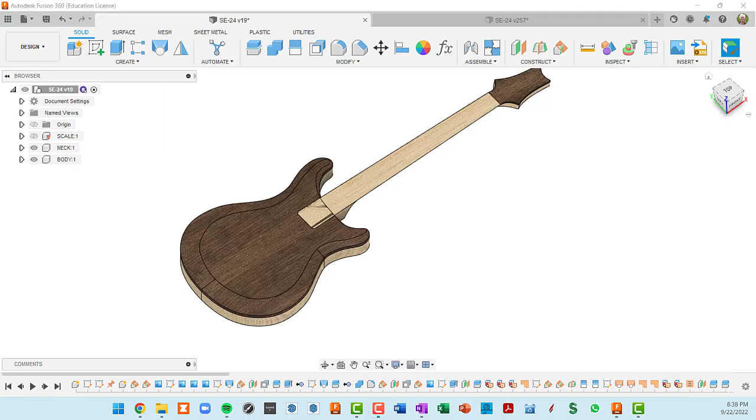Okay, let's get started. So this is where the Fusion file sits right now. We've got a body that's created and a neck. The body has a contoured top, but does not have the famous PRS neck access cut here, and also a belly cut on the other side. So I'm going to start with this neck access.

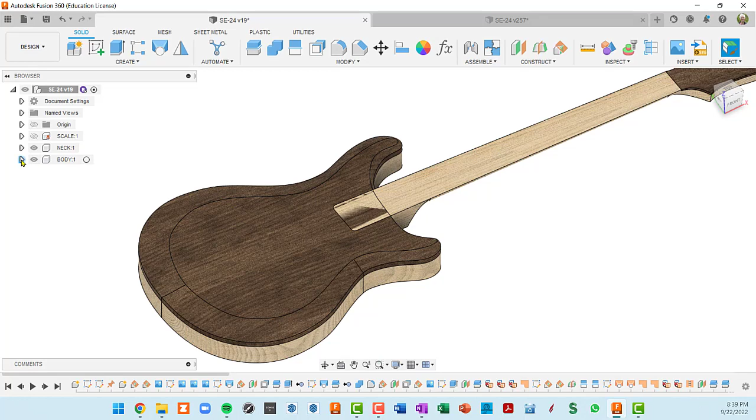And to do so, I'm going to activate the body component, because we're going to be working inside there. And I'm going to turn this canvas on, and I'll also clean things up here. I'm going to hide the neck, and we can leave the construction folder going right there. Okay, so this is the body cut. You can see it in the

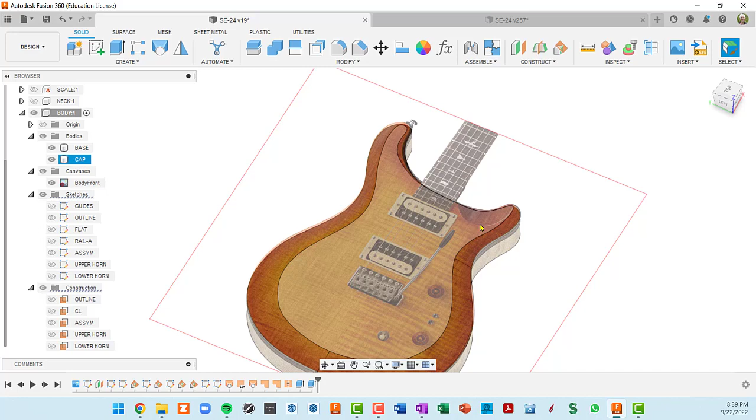captured picture. One thing I realized when I was trying to figure this out, I took a beer can, and it actually fit pretty nicely in this cut, at about a 45-degree angle. So I got a rough radius and a rough angle from that, and something that looked pretty good that I was happy with. But I'll show you how to do it, and you can play around with it to your heart's content.

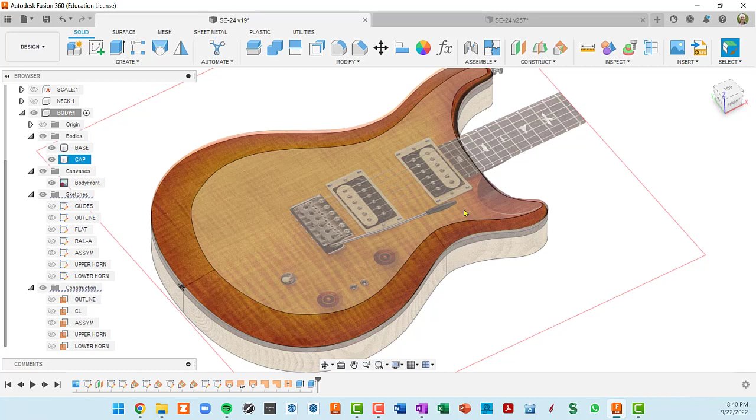So what I did to start with is create a sketch on this top surface. So I'm going to pre-select that top surface. Once again, we're in the body component, and then I'm going to create a sketch, and we'll just spin it around here. Okay, so if I turn on our guides, you can see there's a line here and a line here that was purposely added for this in advance. It basically shows where that cut starts and stops.

So I'm going to project those two lines in. I hit P for project, select the two lines, and then press enter. So those are now in the sketch that we're working in. And I'm going to basically just draw a line where I want the midpoint of this arched cut to be. What I found worked best was to start pretty close to here.

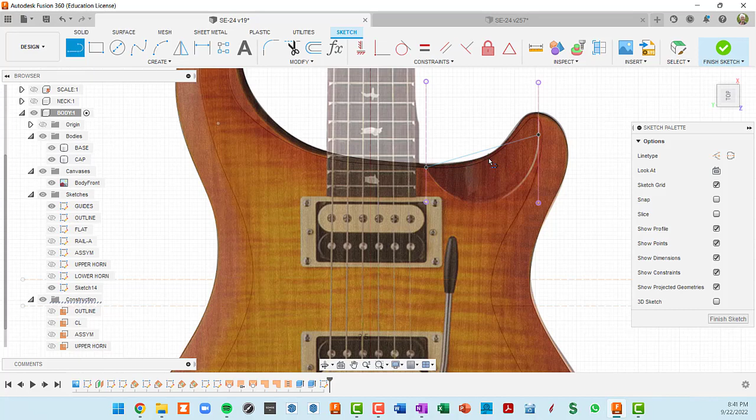So I'm intersecting this guideline, and I'm going to intersect this guideline. In this case, I'm not going to go all the way out to the end. And this is kind of defining a semicircle here, not quite, but almost. So I made my line. I'm going to click on it and press X to make it a construction line. And now we're going to use that line to make a plane at an angle.

So I'm going to finish this sketch, and let's go ahead and name that. We'll call that neck access. And I'm going to select this line. I'm going to go to my plane at angle right here. And so here's a plane that's centered around this line, and now we can set the angle. So I'm going to type in 45.

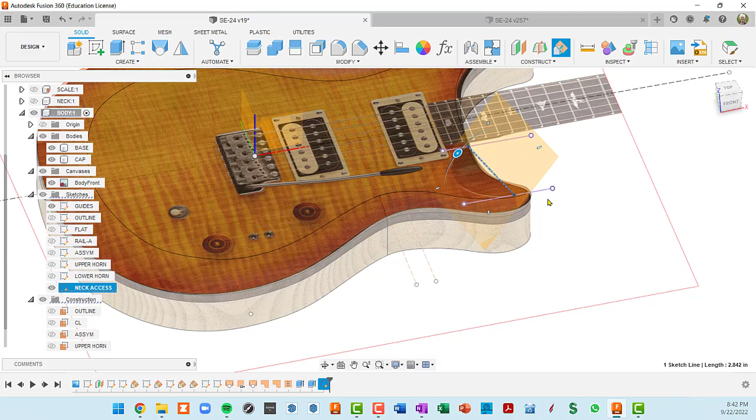And you can see that basically I want to project something on this plane and then use it to cut through to get our cutaway. So we can now sketch on this plane. So I'm going to pre-select the plane, create a sketch. Oops, I created a component there. Pre-select the plane, create a sketch.

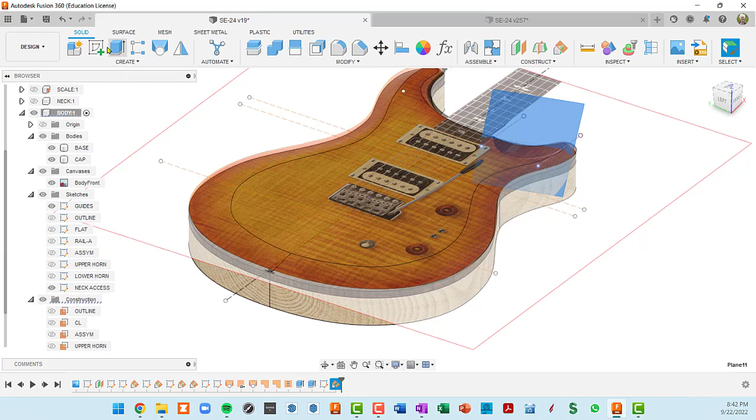Okay, so now I'm going to get a 3-point arc, and I want to intersect with those points that I made between the two guidelines and the line that I just drew. So I'm going to hit escape to get out of my 3-point arc, and let me hit P for project and scroll over here so we can see what we're doing.

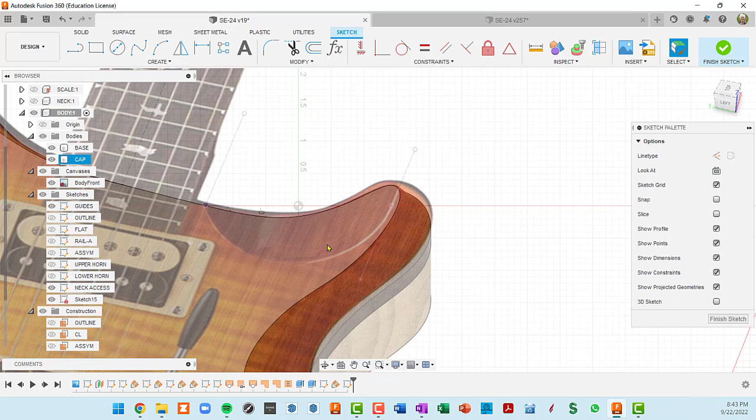And this line and this line, what I really want is this point right here and this point right here. So basically where the line that we just drew to get the plane at angle intersects these two guidelines, those are the two things I want to project in. So projection is now in, and we're on this angled plane.

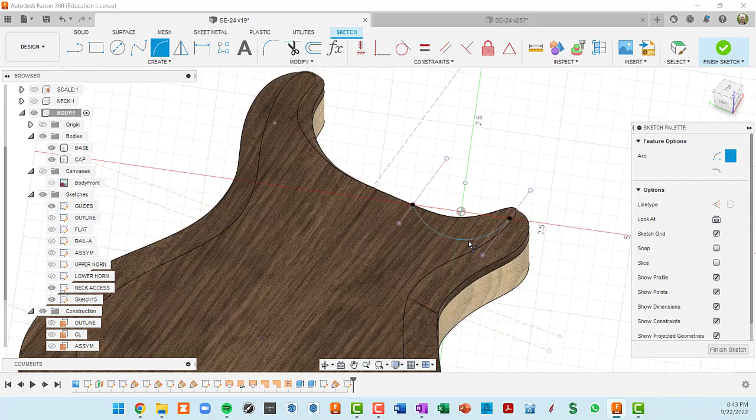We now want to get a 3-point arc. And now we can click here and here, and then drag a radius back. I'm going to temporarily hide this canvas so you can see this a little bit better. Okay, so I'm going to put a dimension on here. And I found out, just experimenting with this, 1.6 was pretty good for me. So now we've got this in a sketch, and we can use that as a cutting surface. So let me finish the sketch first.

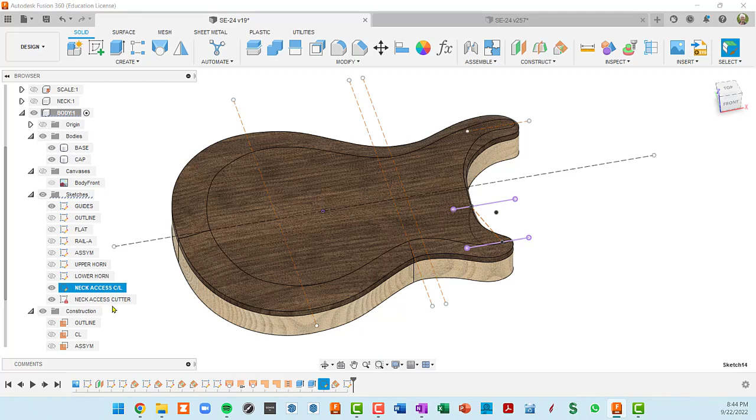So this is our neck. Let's call this neck access cutter. And the other one, let's rename that other sketch that simply has that line in there, neck access CL, center line. So this center line right here we have, and we also have this.

We don't really need the center line anymore, so I'll hide that. And we now want to use this as a cutting surface.

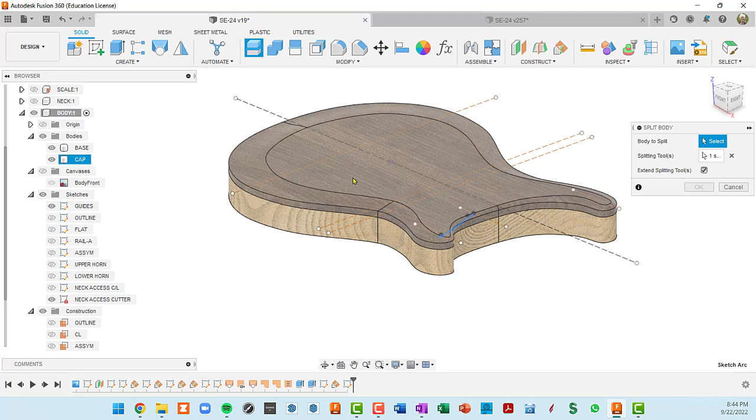So if I go to split body, I have two bodies to pick, so I'm going to pick this body and this body. I guess I had pre-selected, so let me start from scratch here. Let me turn sketches off, well not all the sketches, but I'm going to turn the guides off. We still want this sketch on because we have to select that arc right there.

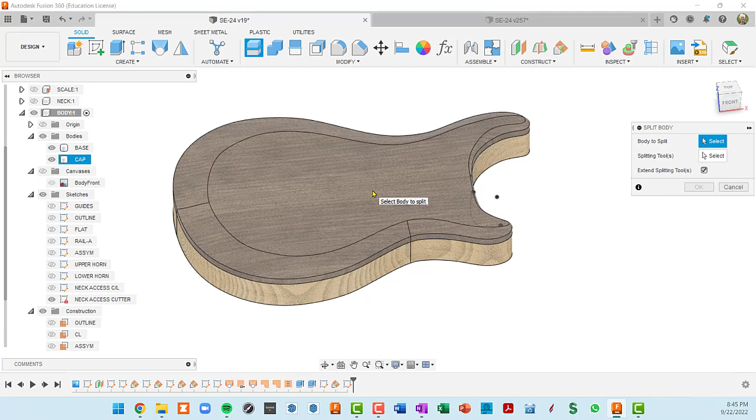So select bodies to split. We want the top cap and we want the body base. And then for splitting tool, we've got something inside here. Let's see if we can select that. Okay, so that is selected. And in this case, I do want extend splitting tool.

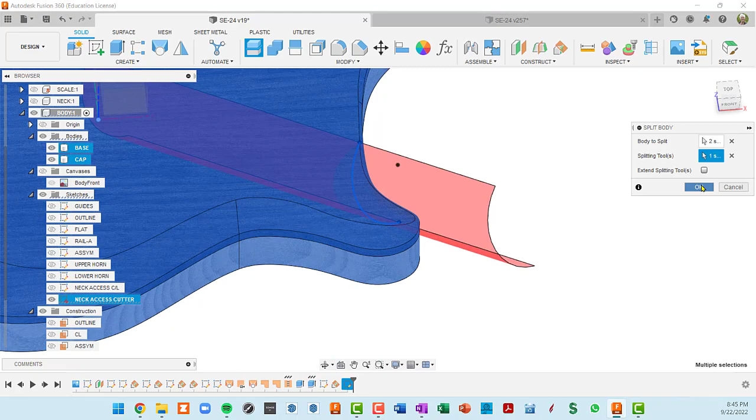Well, let's see, we may or may not need that. Let's do it without first. Okay, so that was a problem in that it didn't go all the way to the edge of the body.

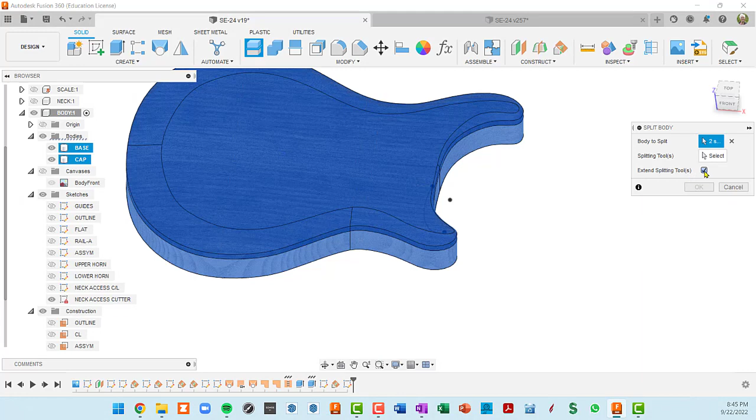So I'm going to do the same thing we just did. Do another split body. The one we just did failed. So I'm going to pick our two bodies here. We'll also turn off our guides. And this time we're going to extend splitting tool. So I've got to select that arc again. So there's the arc, extend splitting tool is on.

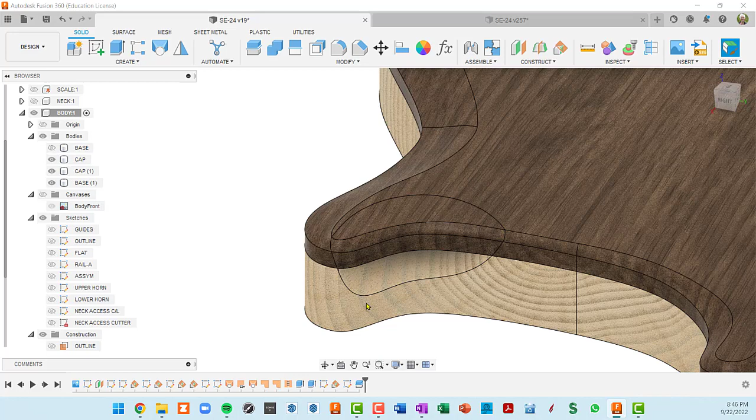So now this is going to extend and cut all the way through these bodies, and that should work. And it did. So now we have some extra bodies to get rid of. The way I do this is I just try to hide something. You can see that that body went away, and this body went away. So we want these two bodies and we want to remove the two that are hidden.

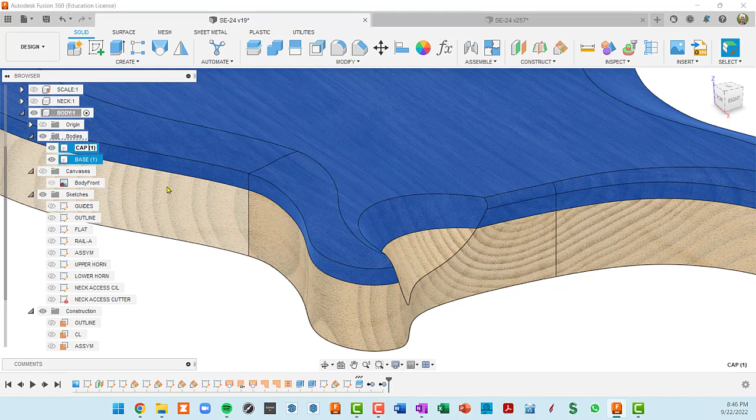So I'm going to click and shift click and right click and do a remove. And then if you really cared about it, we can come in here and rename these guys to get rid of the automatic suffix that was appended to their names.

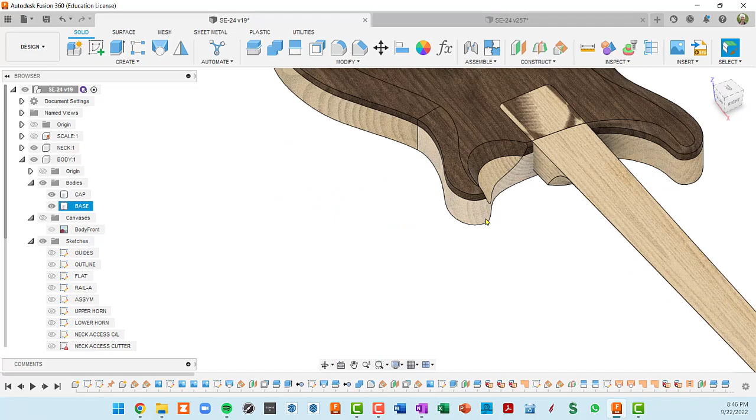Okay, so let's take a look at that. Let's go ahead and put the neck on. Turn that on, and we'll go up to the top level component so we can see everything clearly. And take a look, we've got a nice neck access cut. It doesn't quite go to the neck, which is the case in my PRS, and it's very similar to that.

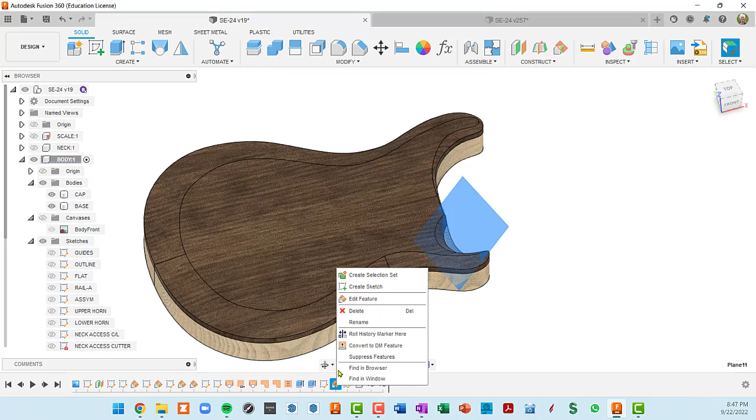So all you would have to do if you want to play with this is go into the sketches. If we go back to the body, let me hide the neck, and you can basically do an edit feature here to change the angle of the plane. That would change the angle of what we cut if you want to make it a little steeper. You can go into this sketch and you can change the radius.

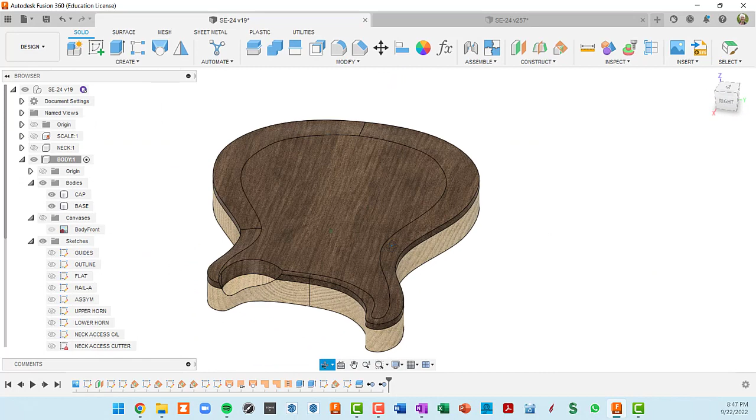Let me just do that here to show you what we get for a difference. And if I do an undo, so it's slightly different, it's not much. But if I go back to 160, you can see that that's a little bit different, not much.

Okay, so that is the first cut that we're going to do. Next I'm going to create the belly cut on the back side of the guitar. So to do that, I'm going to import a canvas so that I can trace a spline where this belly cut is on the back. First off, I'm going to make my canvases visible, and I've got my body as the selected component here, the active component.

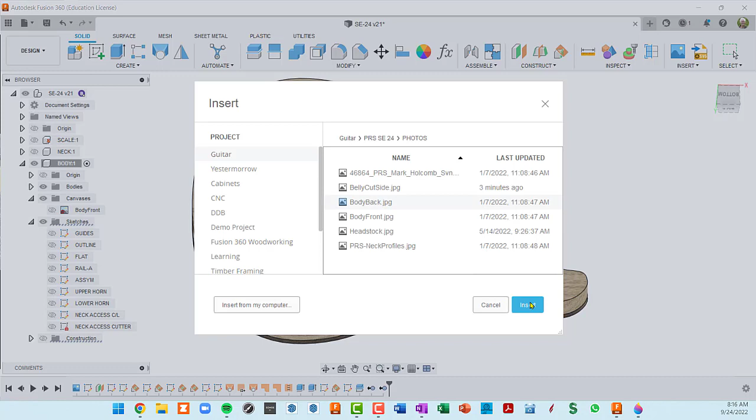I'm going to do an insert canvas, and I will go to this photo called Body Back that I had previously uploaded, and I want to put that canvas on top of this surface. So first off, I'm going to rotate it, and then I've got to scale it appropriately. So to do that, we want to take a top-down view here.

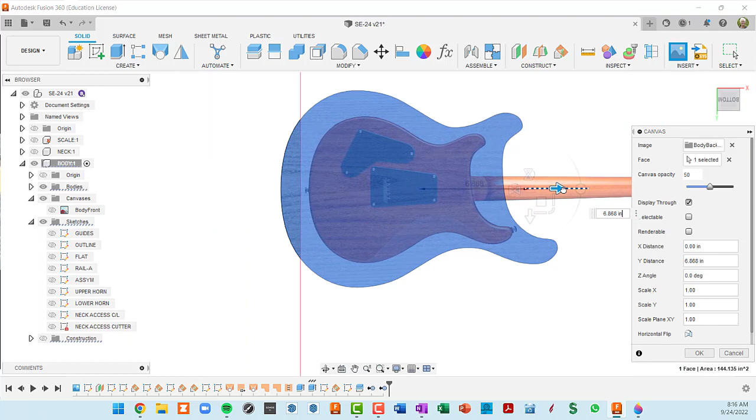So I don't have anything that I'm going to measure here. Generally, that's how I would scale one of these imported canvases, but I think in this case, all we want to do is kind of trace this belly cut contour. So I'm just going to do it by hand here, see if I can get something that is close.

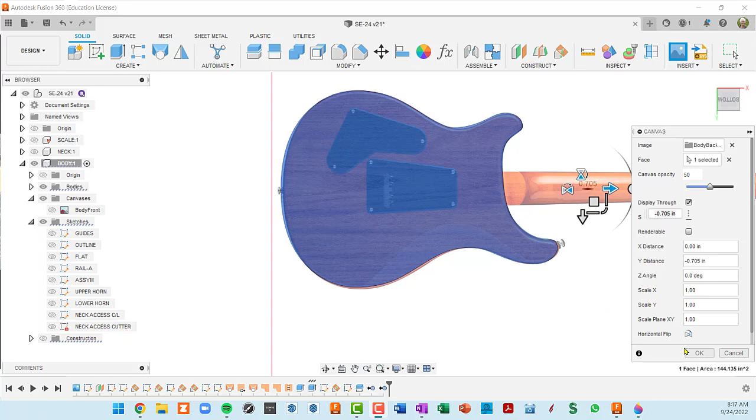So I stopped the recording there just because that was going to take a little bit of fussing, but I've got something that looks like it is positioned and scaled properly over the existing drawing. So let's go ahead and take a more normal view of this guitar.

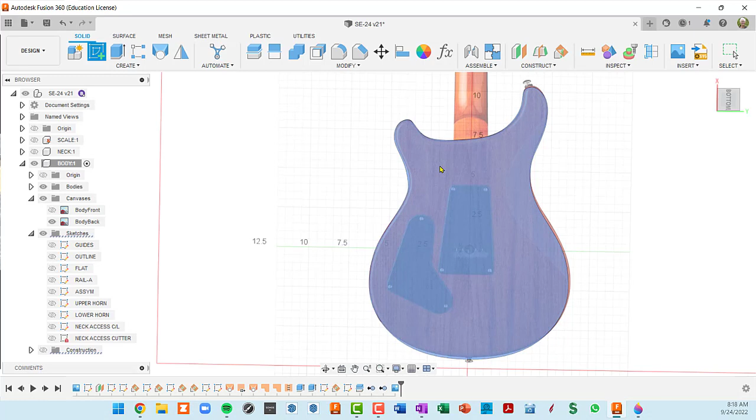Basically I want to create a spline like this in this top-down view. So the first thing I'm going to do is create a sketch on this top plane, the back. Then I'll get my spline tool, and basically I want to go from the outline of the guitar up here and then back to the outline of the guitar. But I don't have anything that I'm snapping to.

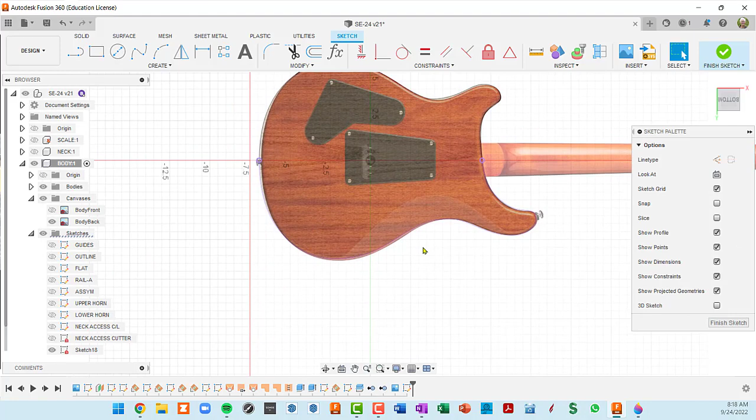So I'm going to hit Escape and hit P for project, then click on the outside contour of the guitar and accept that. Now when I go back into my spline tool, I should be able to get an intersection here, which I'm getting. Then I'm going to go up to where this curve transitions, click there, and then come back and get an intersection here, and click on the check mark.

So it's a little hard to see this blue line. Let me see if I can select it here so you can see it's pretty good until we get down here, and then it's a little bit off. So I'm going to take this handle. I'm going to try to take this handle.

So I think there's some constraints on here. Let me click on this point and delete my coincident constraint and see if we can now edit the handle. Okay, yeah, I'm not sure why I'm not moving the point. I'm not sure why that prohibits me from using the spline handle, but it seems to.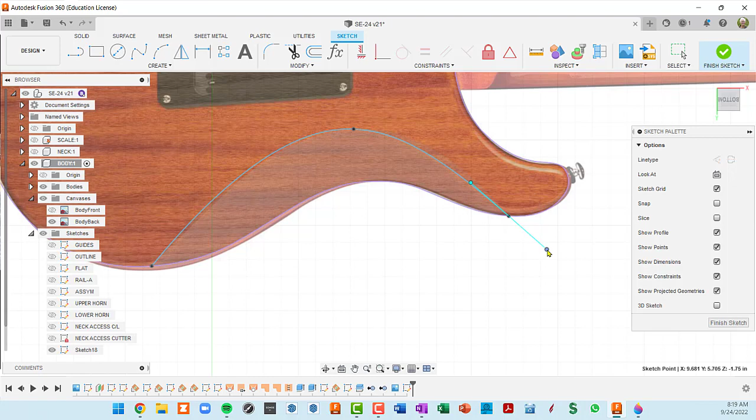Okay, so now our spline is there. It's a little bit off this line, so again we'll click and see if we can modify this handle. No, we can't. So I'll click on this point and delete this coincident constraint, click on the line again on the spline to get the control handle. And now I've got it pretty much in the right position.

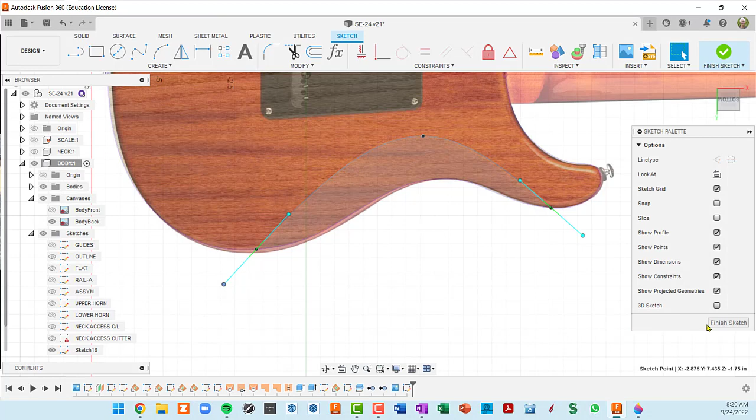So I like that, so I'm going to finish the sketch. And let's go in and name that sketch. So this is the belly cut sketch.

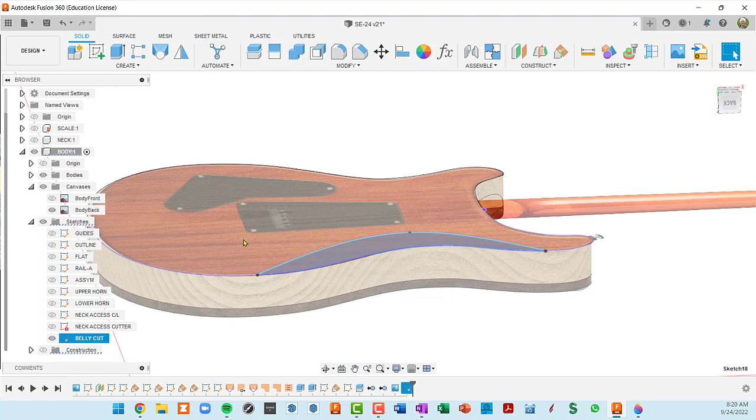Okay, so now we want a similar spline when we look at the side to see how far down this comes. So we really can't get that information from this canvas, so I'm going to go ahead and hide that. And we're going to bring in another canvas. Basically we want to kind of put it probably on the center line axis. So let's see how that works.

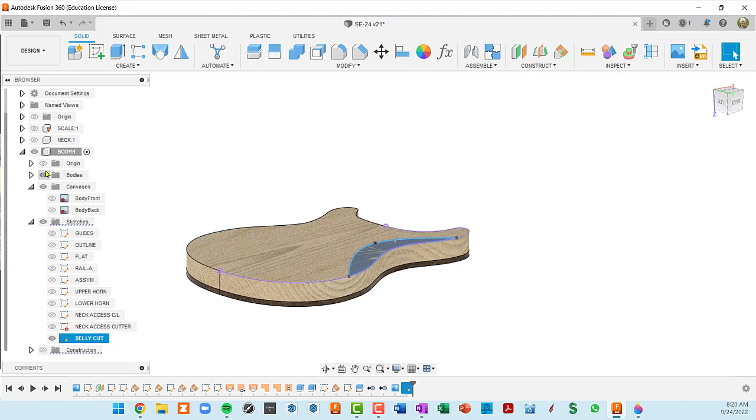So we will insert - I tell you, before we insert, let's go ahead and turn our origin on. So now we have a plane right here to select when we put that canvas. We need to put it somewhere. So I'm going to get the, what did I call it here, belly side cut. That's probably what I called it.

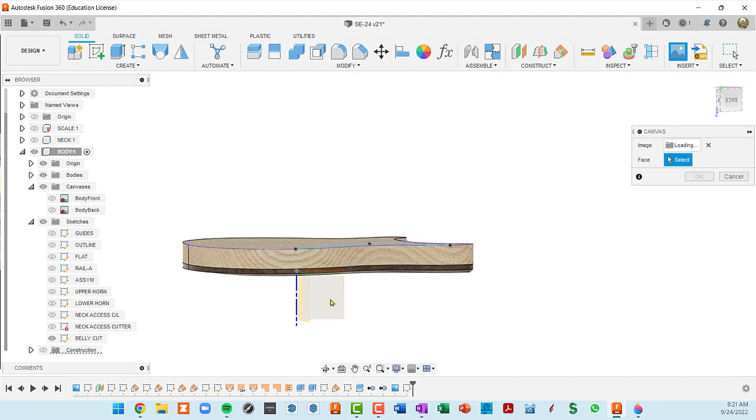So insert, I'm going to click on this plane. And I'm not seeing it. Let me zoom out a little bit. Oh, am I not getting the right image? Let's see, belly cut side, insert. There it is. Okay, not sure why that didn't work the first time, but it's there.

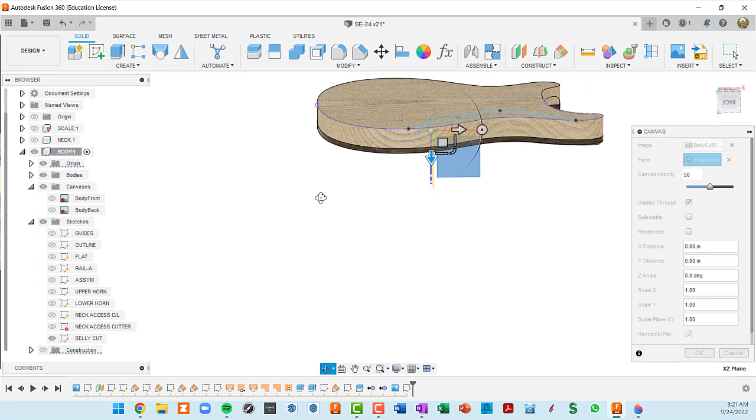So we can scale it by using this handle. A little tough to see, but it is getting a little bit bigger. So we're going to look straight at this side and see if we can align this.

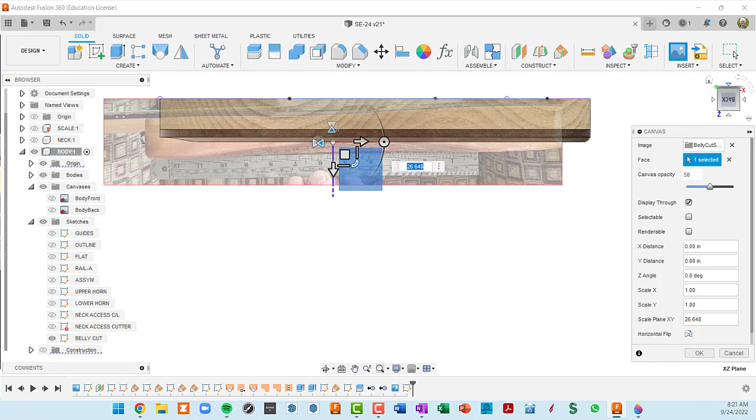So again, I'm going to stop the recording here and get it in the right spot so you don't have to watch me fussing.

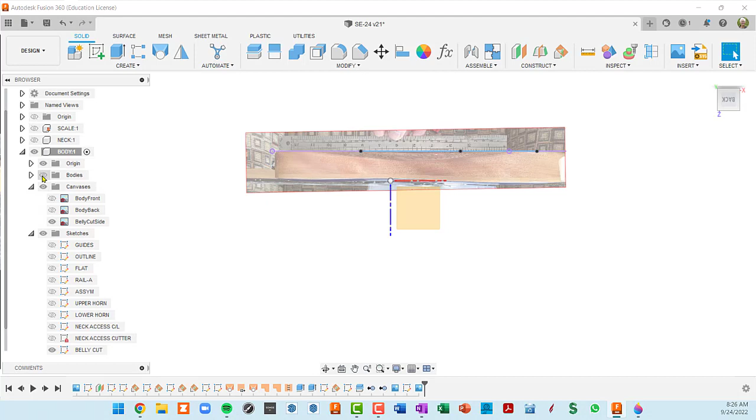Okay, I've got my image positioned now, and it's pretty difficult to see, but if I toggle the body on and off, you can see that the photo kind of aligns to the body now and is the right size. Okay, so that's going to allow us to proceed here with doing a spline on this side.

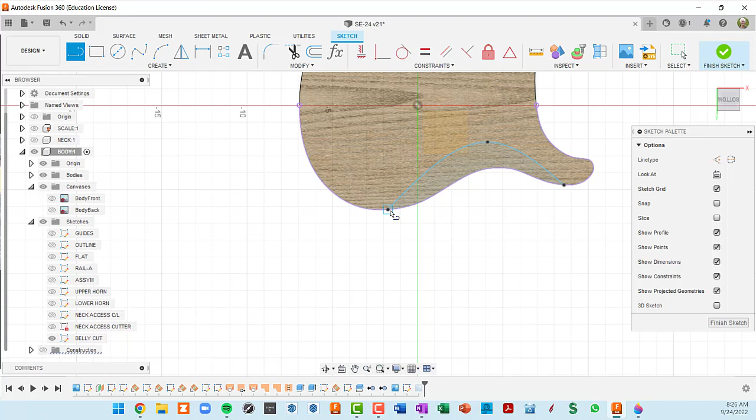One thing I forgot, I'm going to go back to this sketch and do a line connecting the two endpoints of the spline. So I'm just going to click on the line, right click, and edit sketch. That's an easy way to get into a sketch. So I'm going to go to my line tool, and I'm going to draw a line making sure that it intersects at these two spline ends.

And this one, I'm going to hit escape, click on it, and press X to make that construction geometry. Okay, so I'll finish the sketch.

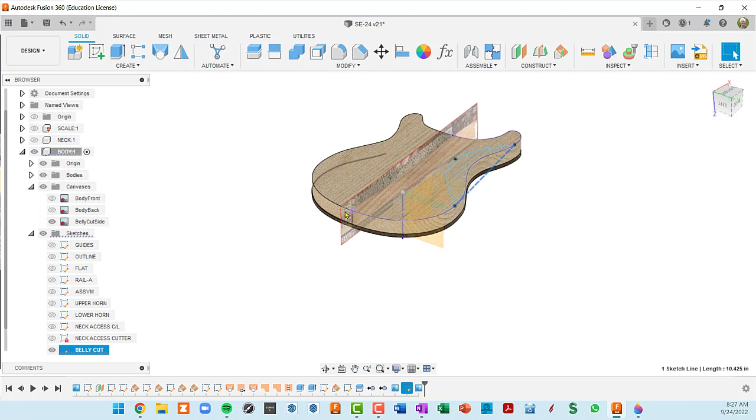So here's our inserted canvas that we're going to be looking at from the side. So now what we're going to do is we're going to create a plane right here at a 90 degree angle to this line that we just drew, and that's where we're going to sketch this side profile of the belly cut on. So I'm going to pre-select this line, go up to construct, plane at angle.

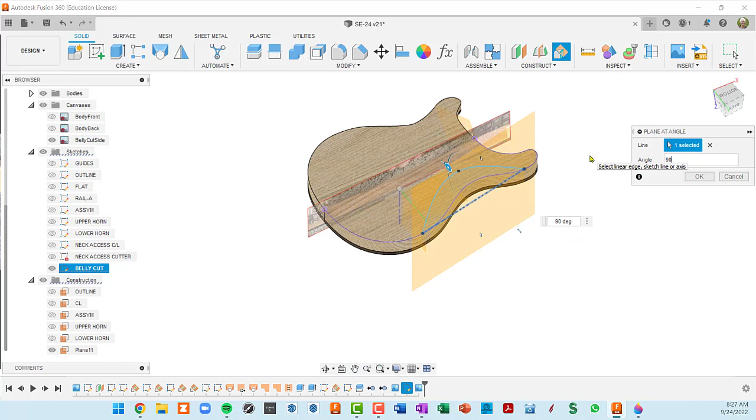I'm getting a warning here, and basically that's because over in the browser I've got all my construction planes hidden. So now we can open up that folder and we can see that, we're about to make a new one here. Okay, so if I type in 90 degrees here, we're going to have a plane that's in the right orientation for us to do a sketch. So I'm going to do an OK.

I've got an unlabeled plane here. Let's see where that is. Oh, that was the plane we used for the neck access cut. So I'm going to name both of these. I'll call this neck access, and the construction plane we just made, I'm going to call that our belly cut.

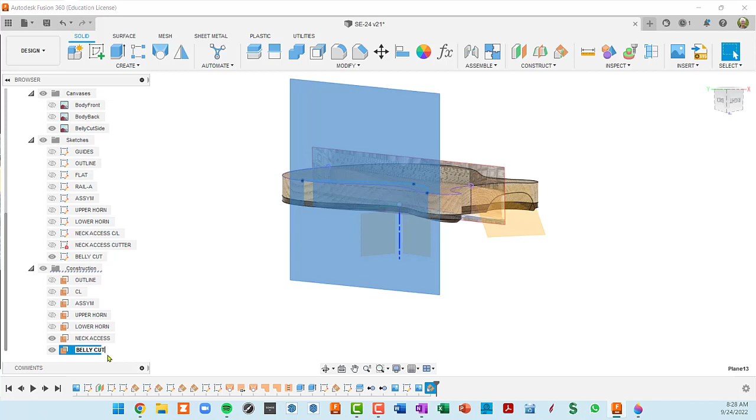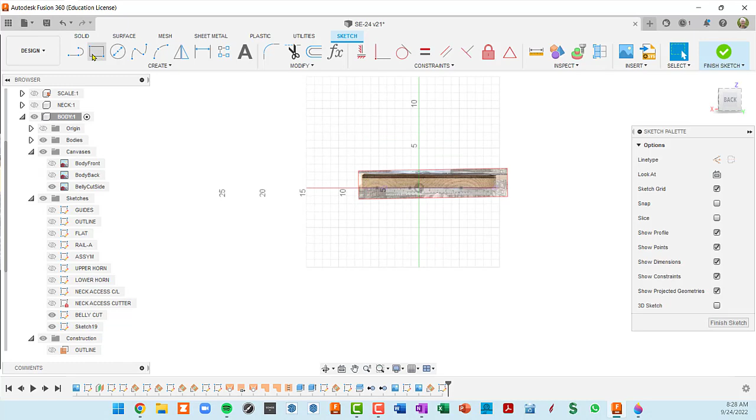Okay, and so let's hide everything but our belly cut. All right, so now we want to create a sketch on this plane. I see that I've got the origin displayed here, so I'm going to go up and hide that. All right, so I'm going to pre-select that plane and then create a sketch. All right, and the sketch did turn us upside down, so I'm just going to leave that for now.

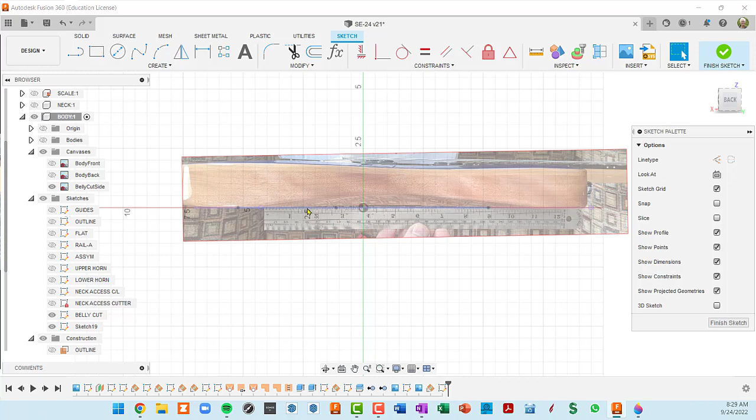All right, so now we want to do our belly cut, and basically, let me toggle off the body here so we can see what we're doing. So we're going to be going from this point and then make another spline point here and then come down here. So we want to, that's our line that we just drew in the other sketch.

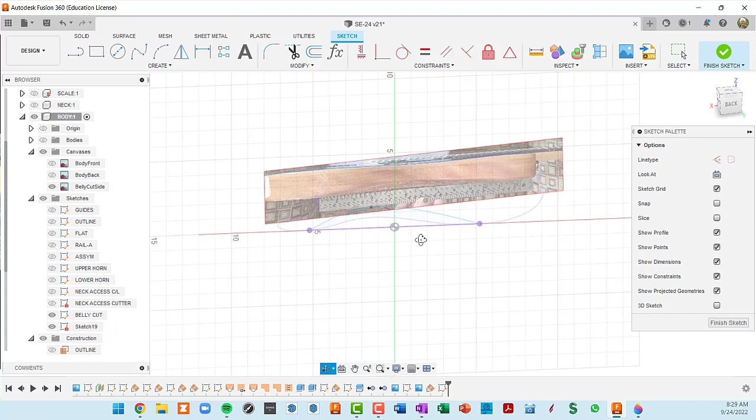So if we project that in, we will have the endpoints. So let me do that first. I'm going to hit P for project, and let's see if we can find it. There's the line right there. So I'm going to hit enter. So that is now in our sketch, allowing us to do a spline from there to there.

So let's do a look at, which is going to orient us straight at that construction plane that we did our sketch on. And now it's just a matter of going into our spline tool, starting here, going to the top of this belly cut, and then back down. Now it does look like the photo's a little bit off here.

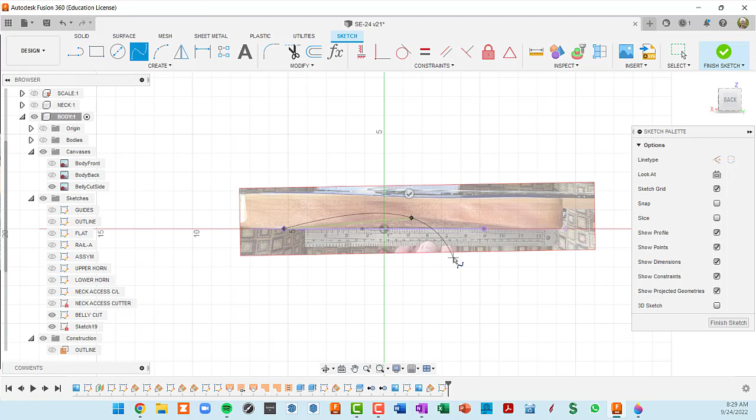But I'm just going to use the photo. I think if I was building this guitar, I would... I am building this guitar. If I wanted to be a little bit more careful, I would come in and actually translate that.

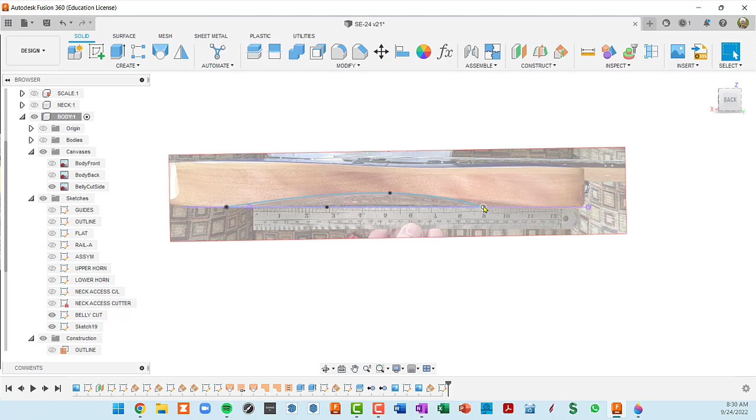Let's do that. All right, so I'm going to move this a little bit over so that this point right here in our sketch orients with the point in the photo. So I'm going to right click on belly cut side, do an edit canvas, and then just bump it this way. Okay, so that better aligns with what we're doing. All right, I'll do an OK.

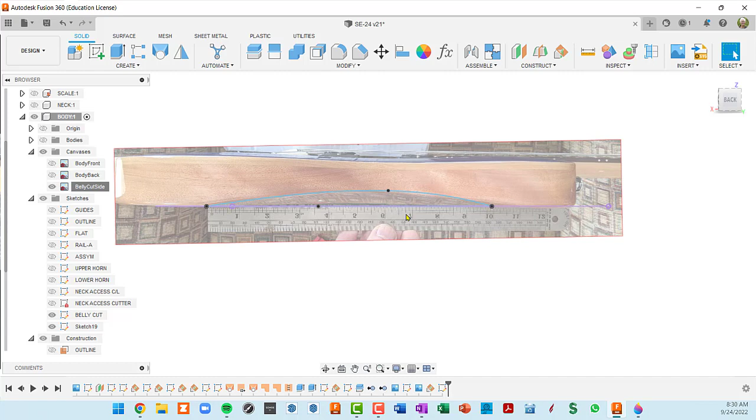And let's see where we stand here. So that's pretty good. So basically I want to fit this spline, make this spline a little tighter to the belly cut in the photo. So I'm going to click on the spline. We want to get back in the sketch. So I'm going to right click on the spline, do an edit sketch.

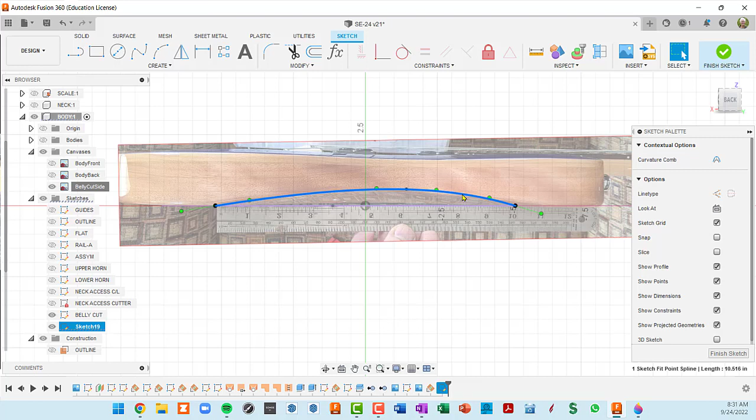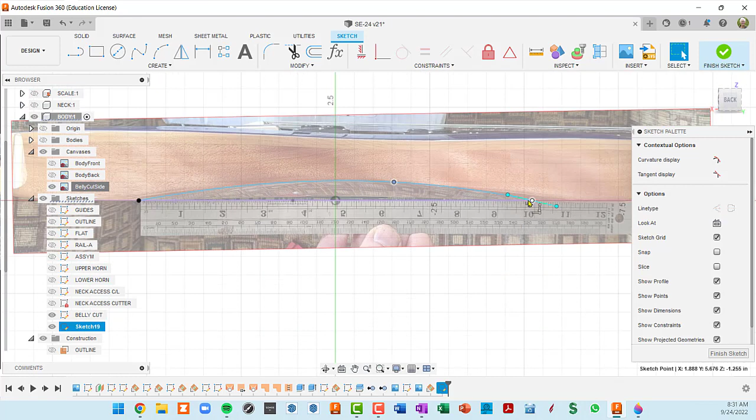So we're now in this new sketch, which is our side view of the belly cut. I'm going to click on the spline and see if I can manipulate its handle. We had trouble here manipulating handles on the other sketch. This one seems to work fine, so we'll go with that. Keep in mind you can also move this point around, and actually just moving the point got us pretty much where we want. Okay, so that's the side profile of our belly cut.

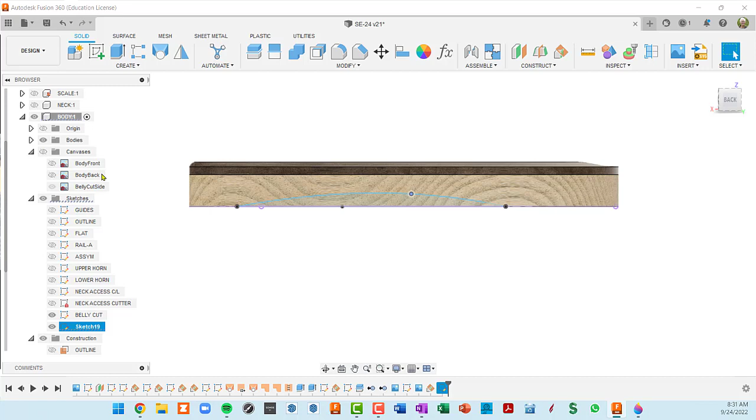So I'm going to finish the sketch, and I'm going to name it belly cut side. Okay, so now we can dispense with our canvases, so I'll hide all of them. And let's get our body shown. All right, so let's see what we have.

We have these two lines that basically, if they were projected to the body, would show us what we want to cut away.

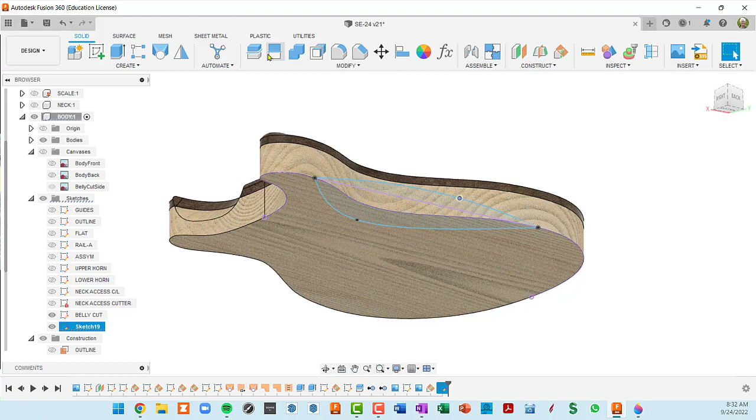All right, so the way we're going to do this is we're going to do a split face, and the face that we want to split first is this face right here. Then I'll select my splitting tool, which is the spline that we made previously. Extend splitting tool is on. I'm not sure you need to have that on, but I don't think it's hurting anything leaving it on. So we're going to go ahead and split our face. All that did essentially was draw this line here, but now we can select either side of that flat plane.

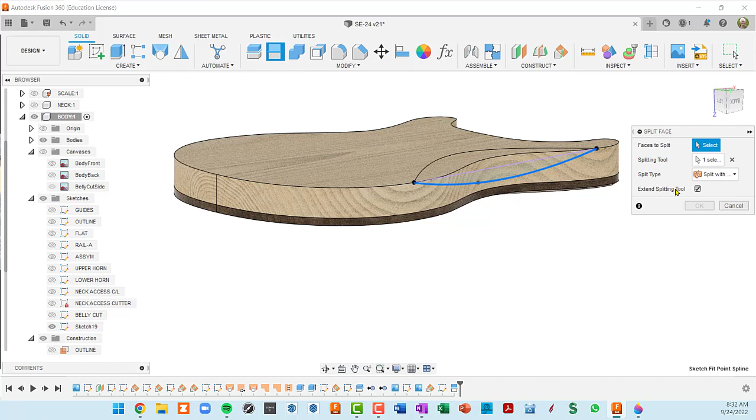And now we're going to do the same thing from the side here. So we're going to click on this. We will go to split face. So faces to split, we want to split this face right here. We had already pre-selected our splitting tool, but if I hadn't, we would just come in here and pick that spline. Extend splitting tool is on. I think that's okay. And now you can see that line got projected to this side surface. So let's just take a look at this and imagine that that chunk is not there. If you want to change it, you can easily go in and manipulate either one of these splines.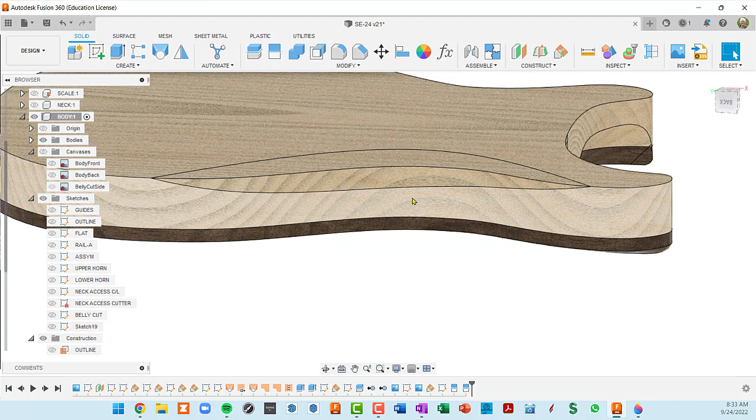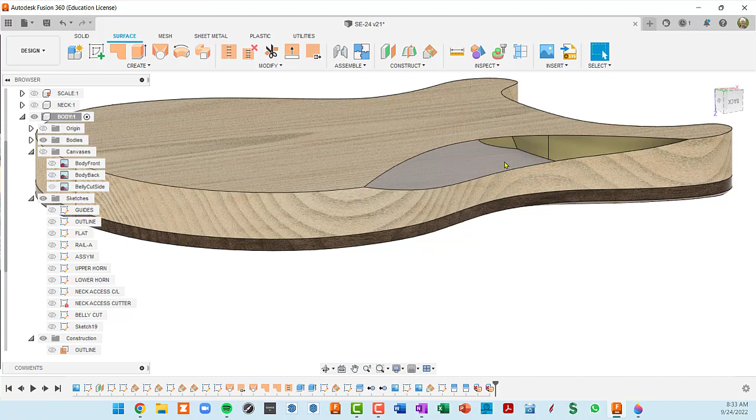Okay, so now to proceed, we're going to go to the Surface tab. And by doing so, we can click on this part of the face that we split and simply hit the delete key, and it goes away. So now we have a hollow structure. We're looking inside the guitar body. If I do the same here, I click on it, hit delete, we've now opened up that cavity. And now it's a matter of how do we fill that cavity in.

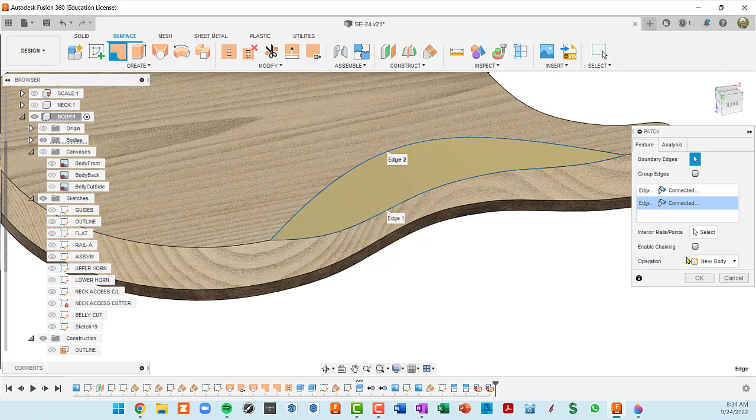Well, we can just use the patch tool and select this perimeter. If enable chaining is not on, you would have to select this side and this side, but I had it turned on. Okay, so we now have a surface body that, if I hit OK, patches that area that we just opened up.

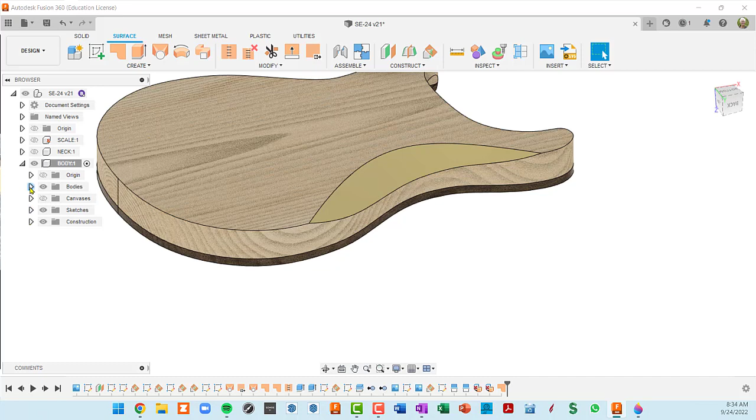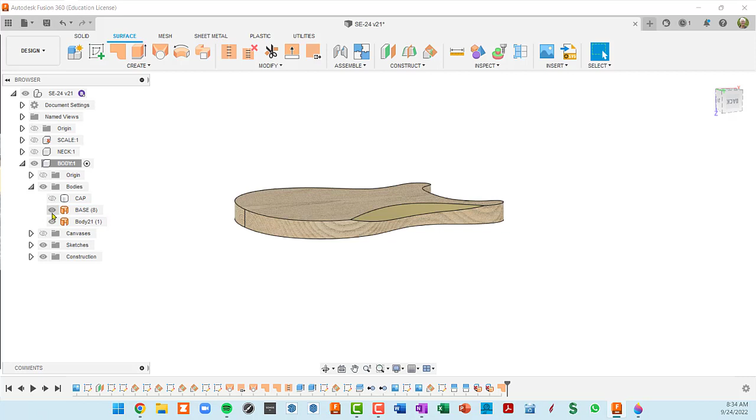All right, so let's look in our bodies folder. I'm going to collapse everything but bodies. And let's see what we've got in there. So we have the cap, which we didn't do any splitting on. The belly cut is really just this base body. And that got cut into two surface bodies. Let's look at them one by one. So there's the patch, and then there's everything but the patch. So if we stitch those two together, we can go back to a solid body.

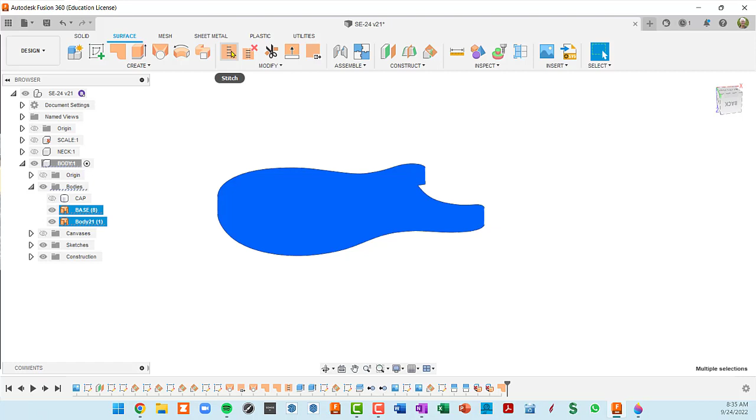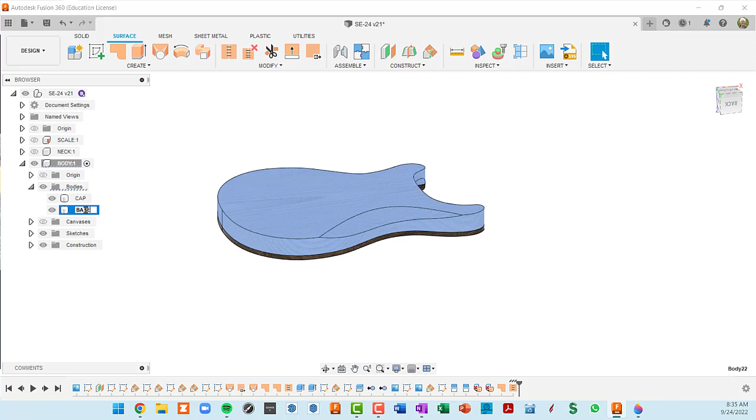So basically I can do a click and a shift click to select those two. Another way you could select those two is just draw around them like that. And then I'm going to go up to the stitch tool and just do an OK there. And now if we look over in bodies, we no longer have any surface bodies, but we have two solid bodies. One being the cap, and the other one just says body 22 here. I'm going to rename that, I'll call it the base. Okay. So now we can go back to the solid tab. We're back with solid bodies. Okay, so we have this cut done, and we have the belly cut done.

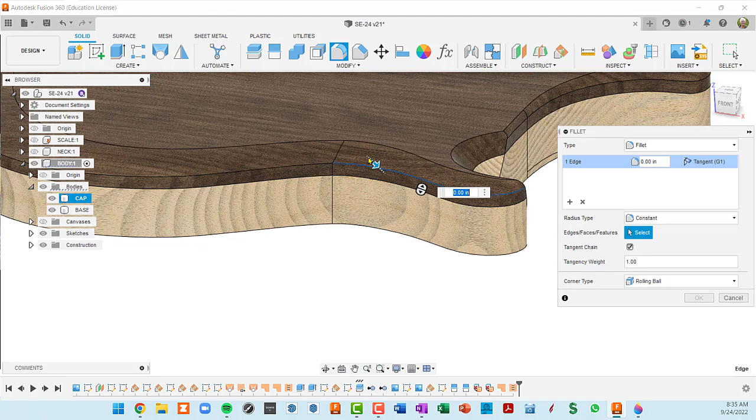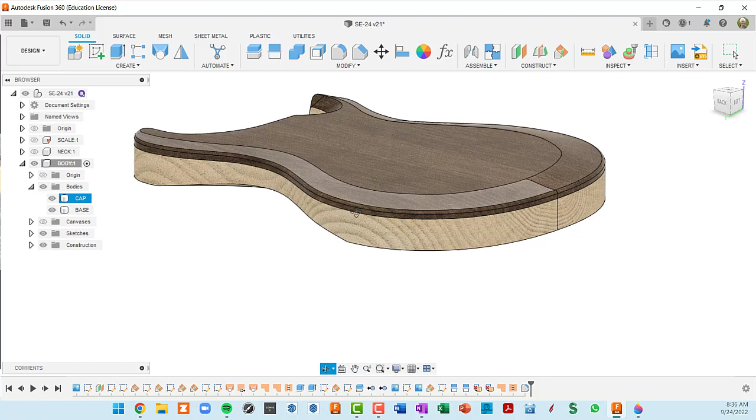And the only other thing I want to do in this video is to round over. So I'm going to go to my fillet tool, and basically I just want to round over the sharp edges here. I don't want to round that because that was already contoured when we did the carving. So I'm going to click on all of these lines around the perimeter that are sharp. Well, there's another one here. There's 4 of them. Okay. And I think I'm just going to try 1/8 of an inch and see what that looks like. So I've got 1/8 of an inch round over that goes around the guitar and basically stops and starts at this neck access.

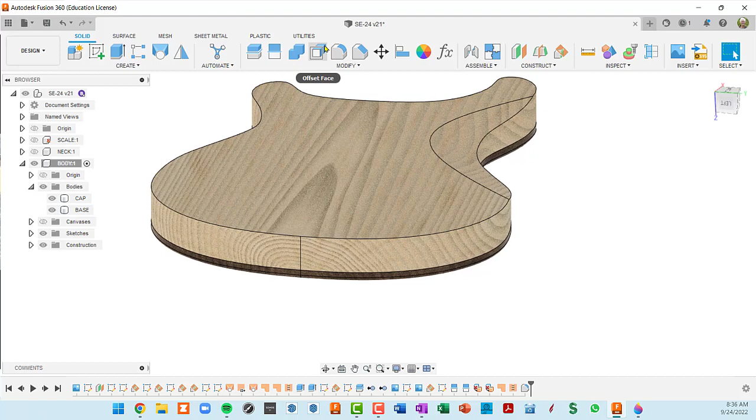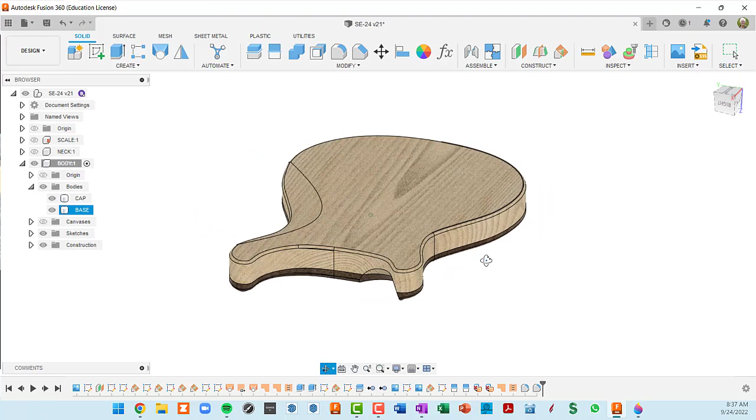Okay. And I want to do the same thing on the back. I don't want to round that over because that's nicely contoured into the body. So I'll go to my fillet tool and I will pick this edge, which goes almost all the way around, and then this edge also here. And type in 1/8. And I got a warning, but it did seem to work. So let's take a look. Yeah, that looks fine. So we now have our 2 body cuts, our neck access and our belly, and we have round over on the top and bottom.